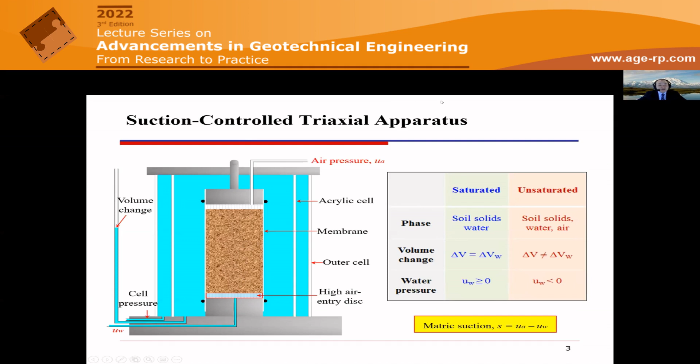Also, they replace the bottom porous stone with a high air entry ceramic disk. Its characteristic is that when it is saturated, only water can go through it, not air. They also supply some air pressure to squeeze the water out of the soil through the high air entry disk. By controlling the difference between air pressure and water pressure, which is the matric suction, we can control the whole stress path when testing unsaturated soils.

So these are the typical stress paths we use to characterize unsaturated soils. Because unsaturated soil behavior is so complicated, every time we just vary one variable while keeping the others constant.

For example, the first one is the isotropic compression test at constant suction. We control the suction, apply all-around pressure to increase the load, and observe the soil response. Of course, we do the test at different suction levels.

The second test is wetting and drying and wetting at different confining pressures, and we also have shearing tests. These kinds of tests are consolidated drained tests for unsaturated soils.

It's very time consuming. Each test takes about 2 to 3 months, and we need about 20 to 30 tests to fully characterize one soil, which takes a very long time, normally 3 to 5 years to finish one soil. So even though it is very challenging...

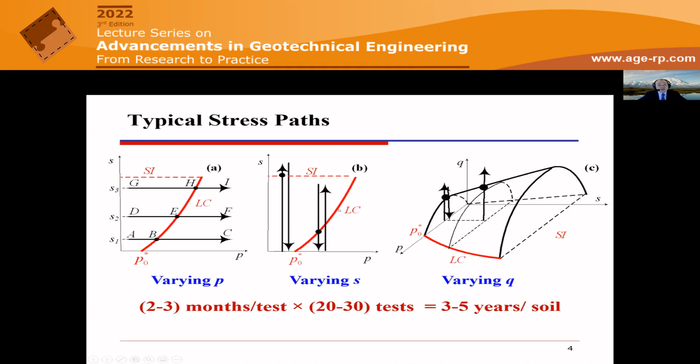...we have been doing testing for the past 6 decades, and now the suction-controlled test has become the standard for unsaturated soil characterization. All the existing theories are based upon results from suction-controlled triaxial tests.

Based upon the results from suction-controlled triaxial tests, Bishop, at the very beginning, and a lot of researchers tried to use the effective stress principle for saturated soil and extend it for unsaturated soil to explain unsaturated soil behavior. For example, Bishop proposed the Bishop's effective stress equation for unsaturated soil.

But Jennings and Burland, in 1962, found that for some compacted fine-grained soils, the soil experienced expansive soil behavior. For example, when you wet the soil at no confining stress, the volume of the soil will increase. But at a high confining pressure, at a constant load, if we add water to it, the soil can collapse. The effective stress equation cannot explain this classical soil behavior.

As a result, the conclusion was that the effective stress equation cannot be used for unsaturated soils. Then Matyas and Radhakrishna proposed a state surface approach.

They said maybe we need to separate the net normal stress and the suction, and then use them to investigate unsaturated soil behavior. This is called the state surface approach, where we use a unique state surface to represent the soil behavior as a function of net normal stress and suction.

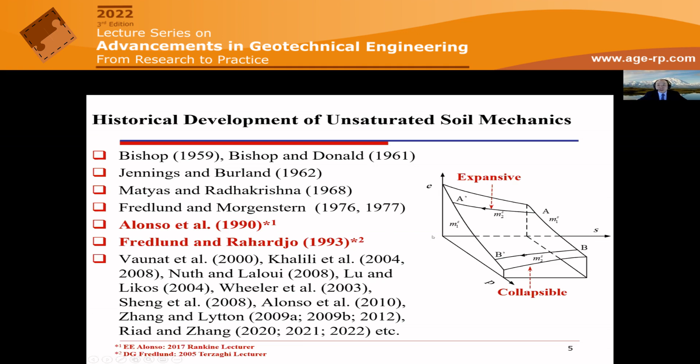That paper is very famous, and afterward many researchers proposed models following the line of the Alonso et al. 1990 paper. We will talk about it later. So please remember this figure—we will come back to it because this is the soil behavior we would like to simulate.

The 1990 paper was developed by Dr. Alonso, Gens, and Josa. It was the first elastoplastic model for unsaturated soil, and it was later called the Barcelona Basic Model, because they later developed a more advanced version for expansive soil behavior.

The model itself is mainly designed for collapsible soil behavior, and it is the most cited paper in constitutive modeling of unsaturated soils. Professor Sheng once said all existing elastoplastic models for unsaturated soils are variants of the Barcelona Basic Model.

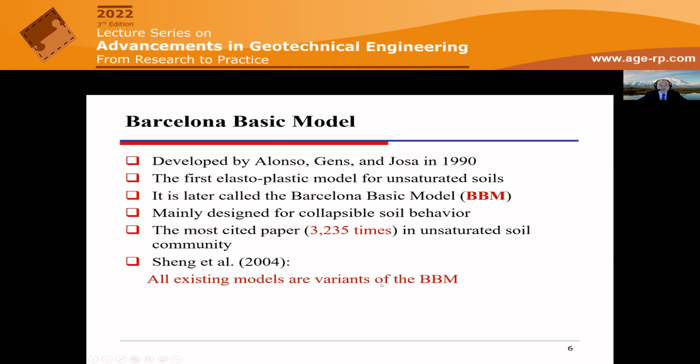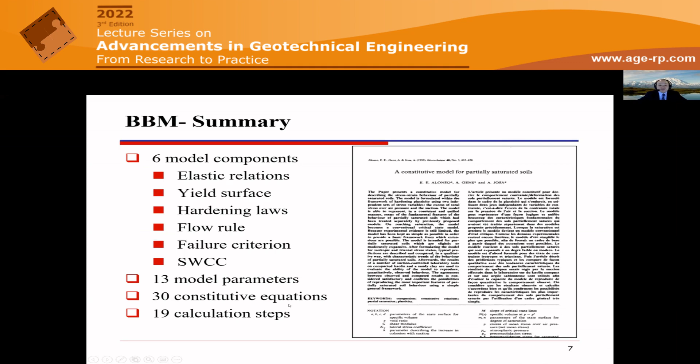So let us have a look at the model. This is a simple summary of the Barcelona basic model. If you read the paper, you'll find it has 6 model components, 13 model parameters, 30 constitutive equations, and if you want to do the calculation, there are 19 calculation steps, which is very complicated.

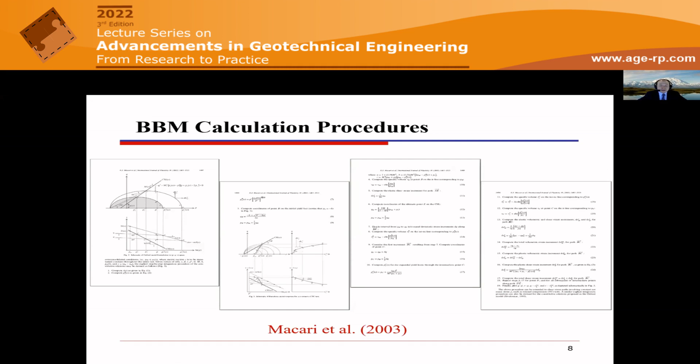So in this presentation, we would like to propose a new approach, which is called the modified state surface approach, to study the elastoplastic behavior for unsaturated soils.

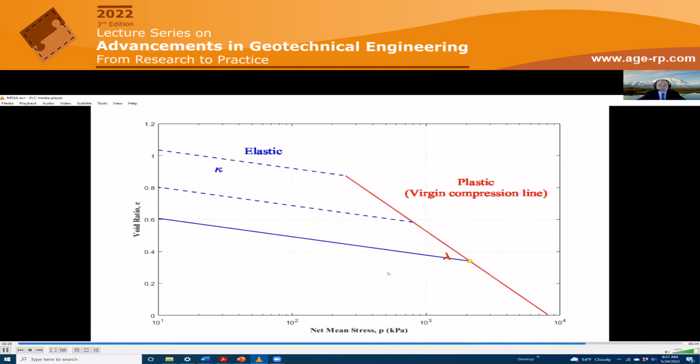Let me replay it again, because this is very important. As you can see, the virgin compression line is actually the future path of the yield point. This is the elastic unloading and reloading during this process, the elastic segment remains unchanged. And then this is plastic loading: the elastic segment will move parallelly downward. If you can understand this process, you can understand the modified state surface approach.

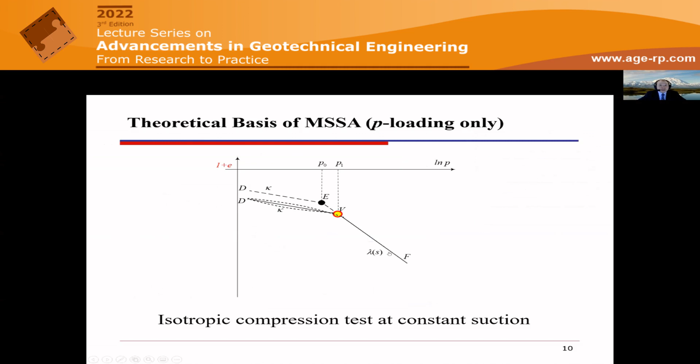So this is a summary for the modified state surface approach when we only have P loading. The test result can be separated into two segments: one is the plastic segment, which always remains stationary, and the other is the elastic segment, which is movable, but it only moves when there is a plastic loading, moving parallelly downward. It will not move when there is elastic loading or unloading. So the intercept point is the yield point. This is very important because it tells us the relationship between the yield point and the plastic segment. In fact, the plastic segment is the future path of the yield point.

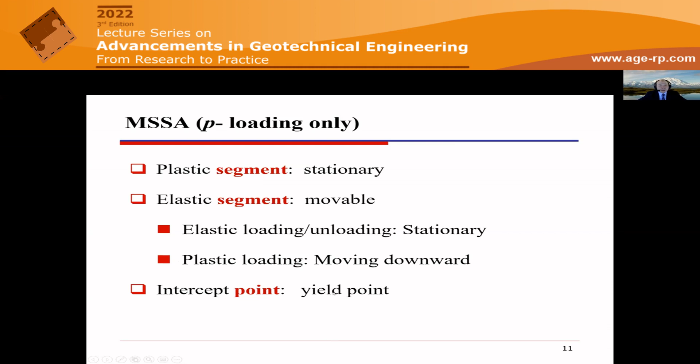Let us go to a slightly more complicated case. For example, we can run isotropic compression tests at different suction levels. For each suction, we have test results like what we showed previously: an elastic segment and a plastic segment. At one suction, and then at the next suction level, we can have the same thing. If we plot the results in the three-dimensional space of void ratio versus net normal stress and suction, you will find the plastic segments are always stationary, with the same shape in three-dimensional space. If we run the tests continuously at different suction levels, the plastic segments will become a fixed plastic surface.

And then the elastic segments will also become an elastic surface. And the intercept will not be a point. Instead, it will be a curve, which is the yield curve. So everything two-dimensional becomes three-dimensional, and everything one-dimensional becomes two-dimensional, right?

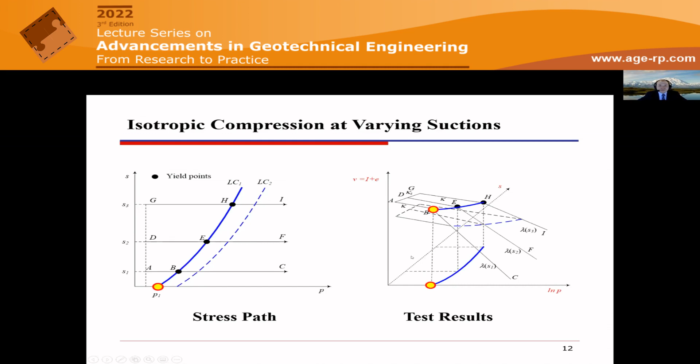So this is a summary for the modified state surface approach when we have the P and S loadings. We will have a plastic surface which is always stationary, and an elastic surface which is movable, but it only moves when there is plastic loading. It will move downward parallelly, and when there is elastic loading or unloading, it always remains stationary.

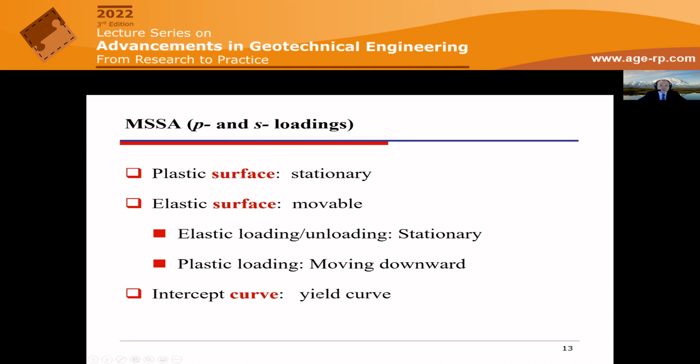And the intercept curve for these two surfaces is the yield curve. The yield curve, actually when it moves, the plastic surface is actually the future path of the yield curve, right? So this is the relationship between the yield curve and the plastic surface.

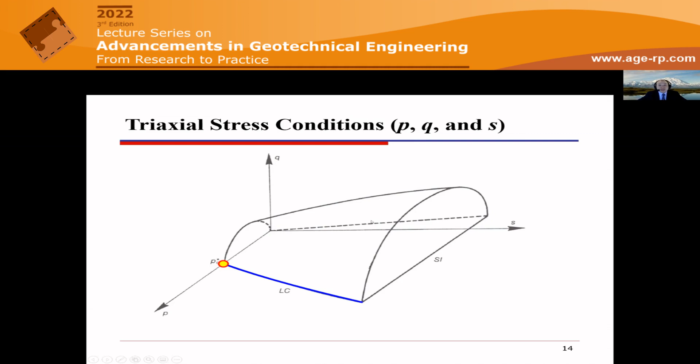And we can keep going by adding the deviatoric stress, but the problem becomes more complicated because now the void ratio is a function of P, Q, and S, and I cannot plot it, but we can still have the same concept. So for the triaxial stress state, we also have the modified state surface approach.

The volume of unsaturated soil becomes a plastic hypersurface. It always remains stationary. We have an elastic surface which is movable, but it only moves when there is plastic loading, and the intercept now is a surface, which is called the yield surface.

And we also have the failure behavior if we have a deviatoric stress. It is the critical state line on the hyperplastic surface. So for today's presentation, I will focus on the isotropic condition, and we will only talk about the first three surfaces.

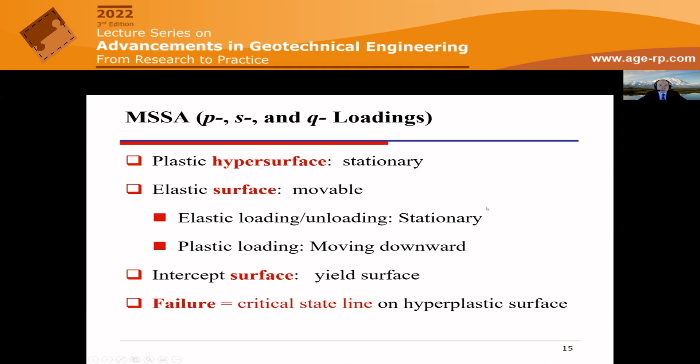So the first example I would like to show you for the application of the modified state surface approach is to use it to explain the Barcelona Basic Model. In the paper I published in the Canadian Geotechnical Journal, we found that in the Barcelona Basic Model, there are three surfaces used.

One is the elastic surface, which is represented by this figure, AFIH, which has an equation like this. And then for the plastic part, it has two surfaces. One is HIJC, which is responsible for the irrecoverable volume change during the drying shrinkage.

And then the second plastic surface, which is called JG, is the surface used to represent the unsaturated collapsible soil behavior.

And then we summarize the Barcelona Basic Model into three equations. If we would like to do the calculation, every time we just need one variable, which is C1, the intercept of the elastic surface with the void ratio axis, and all the rest are fixed. So the calculation will be very simple in our paper here.

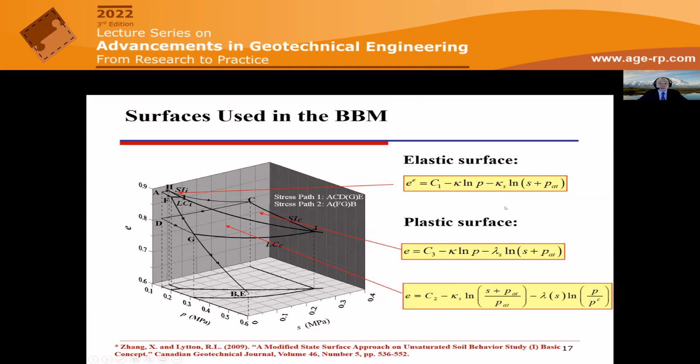It's detailed and explains how to do the calculation, but I want to just show you some videos based upon the calculation. For all the examples in the original Barcelona Basic Model, we have done calculations. If you go to YouTube and search the modified state surface approach, you can find all these videos for each of the examples.

For example, for case 2, the soil is originally saturated, and we increase the suction at a confining stress of 0.15 megapascal, increasing suction from 0 to 0.1. Then we load the soil from 0.15 to 0.6 megapascal, and after that we further dry the soil by increasing the suction from 0.1 to 0.2 megapascal.

So if you use the modified state surface approach, this is a video which shows it. Initially the soil is saturated, and then we dry the soil by increasing the suction at a constant load. This process is in an elastic zone, so as a result the elastic surface remains unchanged, the plastic surface remains unchanged. And then we apply load.

Once it reaches the yield curve, further loading will cause the soil to yield and the elastic surface to move parallelly downward. When it moves parallelly downward, it will form a new intercept curve, which is the yield curve with the plastic surface. So this process is called the evolution of the yield curve, and the elastic surface region is always expanding during plastic loading.

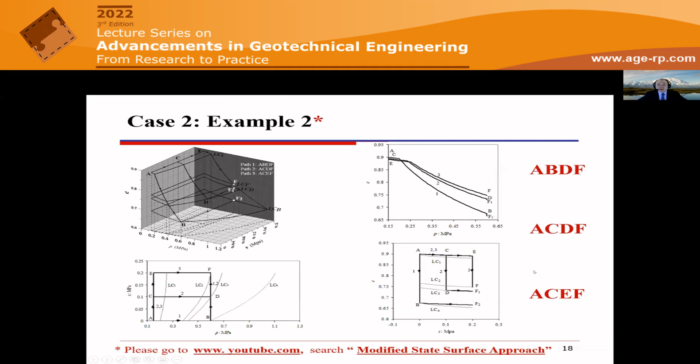And then we did all the calculation. We are able to match all the results in the original Barcelona basic model, except one case, which is the last example for the prediction of Karube's data. So the Karube data is a very interesting one.

They used two identical soil specimens starting from the same point A. For one soil specimen, they first dry the soil and then apply load to the soil at a constant suction. And at a constant load, they wet the soil to the original suction level, and then unload the soil to the original stress state.

And the second soil specimen, they do a reverse way. They first increase the load at a constant suction, and then increase suction at a constant load, and then reduce the load at a constant suction from C to B, and then wet the soil to its original stress state.

So I was able to reproduce the results in the original Barcelona basic model for the stress path of A, B, C, D, A. But we were unable to produce the results from A, D, C, B, A. What we found is there was a small mistake in the original Barcelona basic model.

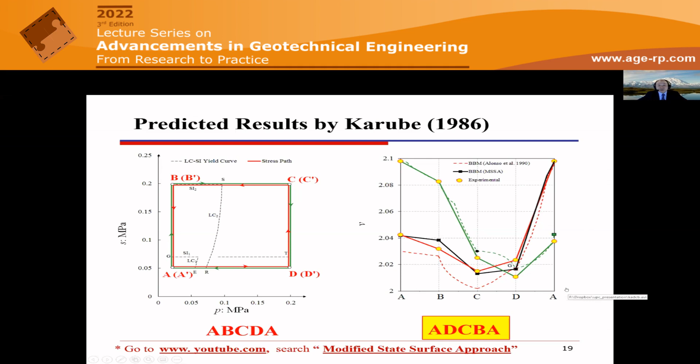So you may ask, why do we need the modified state surface approach? Of course, you proposed a new way to simplify the explanation of the Barcelona basic model, but what's your contribution?

So here I will show you an example why we need a modified state surface approach. For example, in 2004, the European Union funded a project called the MUSE Research Training Network.

One of the tasks for the MUSE Research Training Network is to benchmark the calibration of the constitutive model for unsaturated soils. So what they did was provide 7 universities with the same sets of experimental results, asked to calibrate using the same model, the Barcelona Basic Model, and the same test results to calibrate the same model parameters.

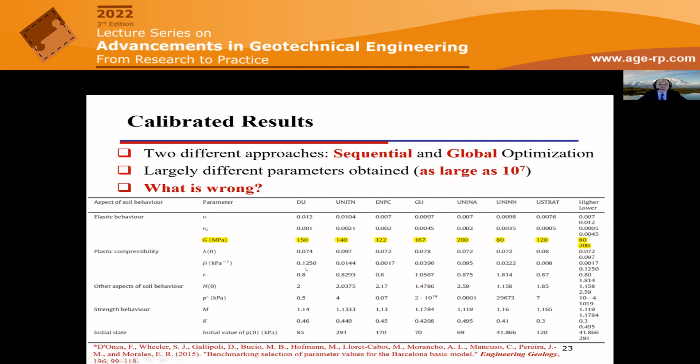So what's the problem? In that exercise, researchers used 2 different approaches: one is called the sequential approach, another is called global optimization. So to make my explanation clear, I would like to give you a simple example.

For example, if we would like to fit a plane using some experimental data, my model is a plane, and this is my test results. I have 4 points. AB is on a straight line at the XOZ plane, with the equation z equals 3 minus x. CD is on the YOZ plane, with the equation 2.5 minus 2y. If I need to fit the plane, this is the plane I will be able to fit. This is the equation we have.

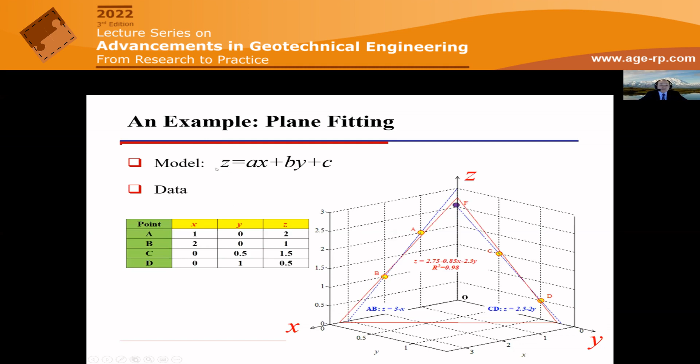So if we need to do the calibration of the model parameters using this data, we can do a sequential approach. In a sequential approach, what people normally do is use the first 2 points, A and B, and fit it with a straight line, getting the slope A, which is -1 here. Then in the second step, you use points C and D to fit a line, getting the slope -2 as B. Then you try to combine these two results as the model parameters for this plane.

Obviously this is not right. The reason is that for the first regression process, we just use the partial test results of A and B to do a partial best fit for the model parameters. It's the best fit for points A and B, but not the best fit for the overall results. The same thing happened for C and D. So even though each regression has 100% R squared, the overall R squared is very low - if you look here, it's 0.6.

If we would like to do a global optimization, which normally uses the incremental formulation, we just take the complete derivative of the analytical solution to get an incremental formulation like this. Then we select the initial point, any of the initial points, calculate dz, dx, dy, and try to optimize to get the model parameters A and B. This is not good either, because every time you have to select the initial point.

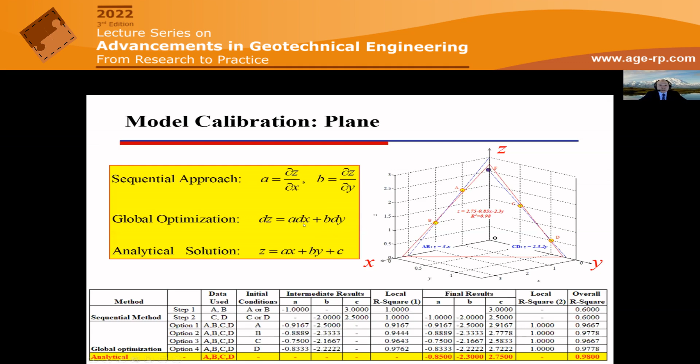So this is simple and clear, but you might not realize that at present, all of us are doing the sequential and global optimization approaches. The reason is that all of our existing models are proposed based upon the incremental formulation, based upon the slopes. For example, this is a summary of what we have for the Barcelona Basic Model - 3 equations, right?

But if you look at the original Barcelona Basic Model paper, you can find it was first proposed using the slope of the void ratio versus the applied net normal stress - a log-linear equation with a slope of kappa, right? And then they also proposed another incremental formulation, the void ratio change as a function of suction inside the elastic zone, with a slope of kappa sub s. So there are two slopes, and the equivalent model for the Barcelona model is the equation of a plane like this.

If you take a partial derivative of this equation, you can get these two slopes, partial derivatives, right? So this is what they proposed for the elastic part. So they also proposed the...

Part when there is drying shrinkage and irrecoverable volume change. They proposed a log linear line, which is lambda sub s, and also a horizontal SI yield curve. By doing so, it is equivalent to say in the plastic surface, when you apply load, the net normal stress and volume change have a log linear relationship, the same as kappa, which is in the elastic zone. And this is how this surface is formed.

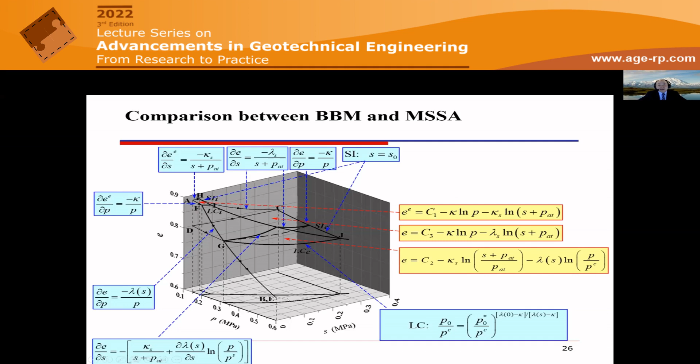But if you use our method, I can show you that the model calibration for unsaturated soil is very easy, because we have the closed form solution. We can just use the test results and best fit these equations, and then we can get the results. So I can show you another example, which includes both the model parameter calibration and the determination of the yield curve.

So there's an argument in terms of what is actually the LC yield curve. It's well accepted, its shape, but there's an argument for the SI yield curve. So many researchers have proposed different kinds of yield curve shapes for the SI yield curve.

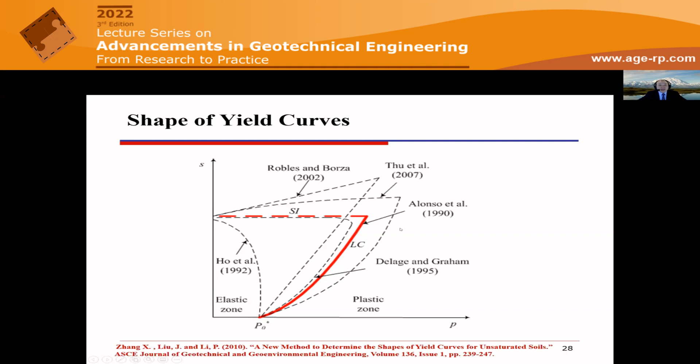So at present, this is how we determine the LC yield curve. We will run a lot of isotropic compression tests at constant suction level, and we have some test results like this. And then by using the Casagrande method, we can find the yield point. For example, for each test, we plot in the P versus S stress path space, and then connect the yield points to get the yield curve.

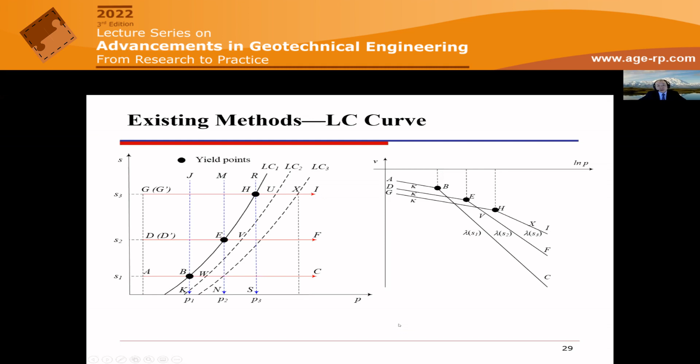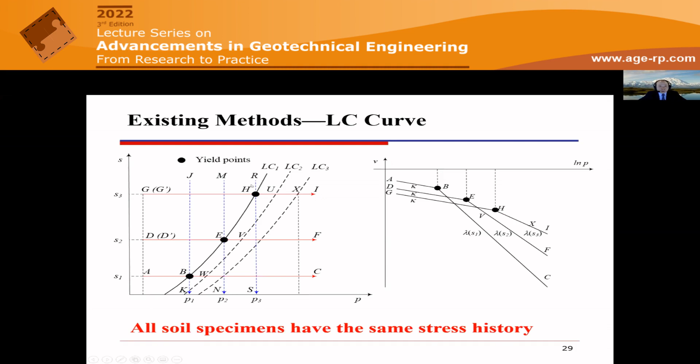So this method is straightforward, but it requires all the soil specimens to have the same stress history, so that all the yield points are on the same yield curve. But in reality, it's very difficult to get identical soil specimens.

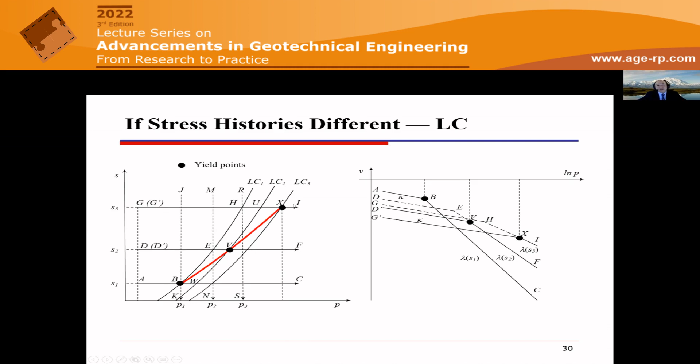And if the soil specimen does not have the same stress history, for example, for the second soil specimen this is its yield curve, and for the third soil specimen this is its yield curve. When you run the tests for isotropic compression, you can still get a similar shape of the specific volume versus ln p curve, and you can still find the yield points, but you will not know if they are on the same yield curve or not. If they are not on the same yield curve and you connect them, it's a wrong result.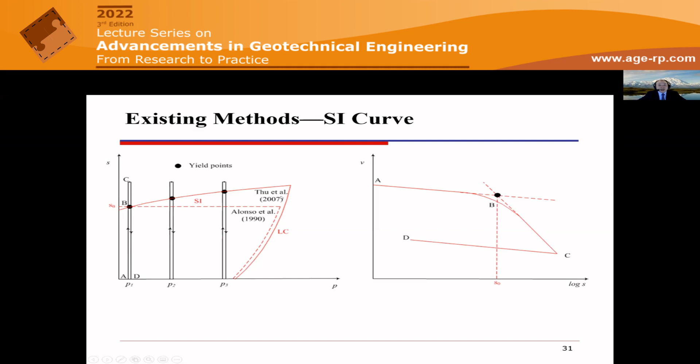So some researchers also use a similar method to determine the SI yield curve, by running drying and wetting tests at constant load, then determining the yield points and connecting them to get the yield curve. This is exactly what is done in Thu et al. 2007. But it also requires all the soil specimens to have the same stress history.

But if the soil has a different stress history, then even if the soil has a horizontal SI yield curve, if you run the test and use the existing method to analyze the SI yield curve, you can get a curve like this. So the existing method is not good if you use soil specimens with different stress histories.

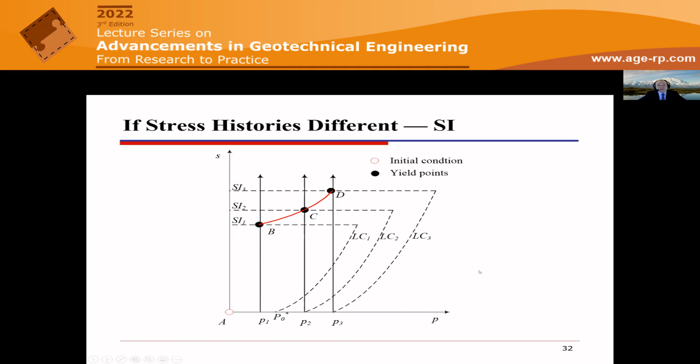But if you use our method, it will be quite simple. For example, these are the test results we obtained from Thu et al. 2007 for a bunch of isotropic compression tests at different suction levels. These are the test results.

We can get the yield points using the constant gradient method. What you need to do is plot all the results in three-dimensional case, and then separate them. From the yield point, you have the elastic segment and the plastic segment. It doesn't matter if the soil specimens have the same stress history, because all these plastic segments will be on the plastic surface.

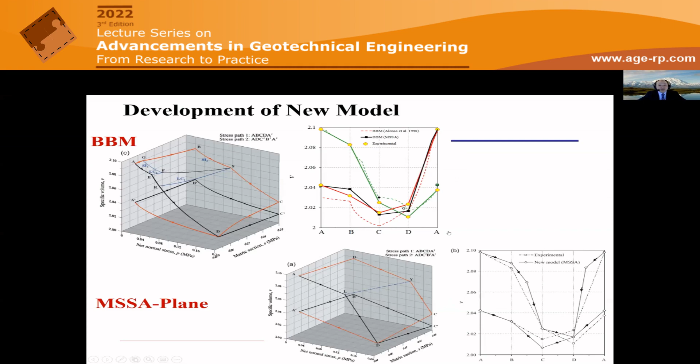So let's go back to this story. For this test results, by doing so we can find the yield curve for this soil. For example, the red solid lines represent the results from Thu et al. for the LC yield curve, and this red curve is the SI yield curve from Thu et al.

But the black lines are the yield curve we got from the modified state surface approach. For this part, the LC yield curve is the same as the Barcelona basic model, but for this part it's different. What we found is that in Thu et al., when they ran the test, they changed the stress history of the soil.

For example, if I would like to run a drying and wetting test, in order to do the test, if I have a soil specimen which is initially saturated, I will have to apply load to a stress of 200 kPa, and then do the drying and wetting test. So during this process, if I load the soil from 0 to 200, I have already yielded the soil in order to be able to run the test.

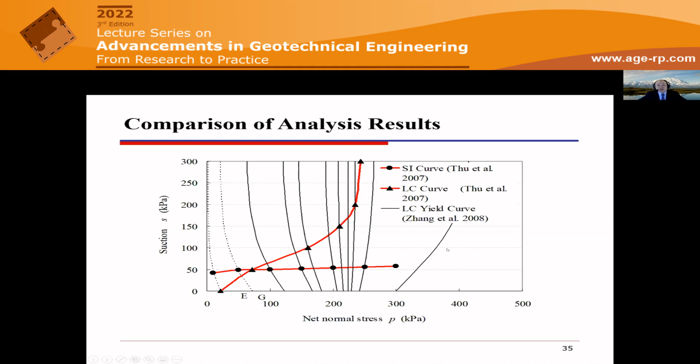Remember, at the very beginning, most compacted soils are expansive at low confining stress levels and become collapsible at high stress levels. This is exactly the yield curve we need to simulate expansive and collapsible soil behavior in a unified framework.

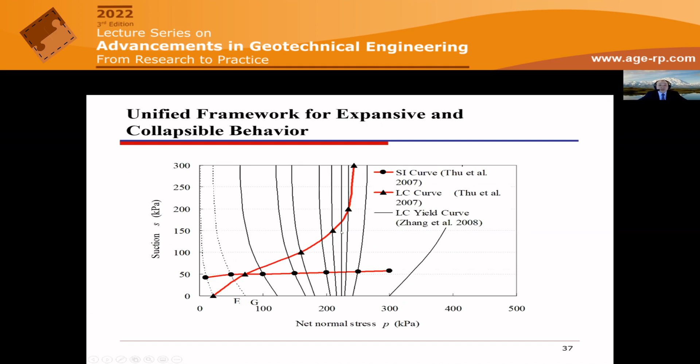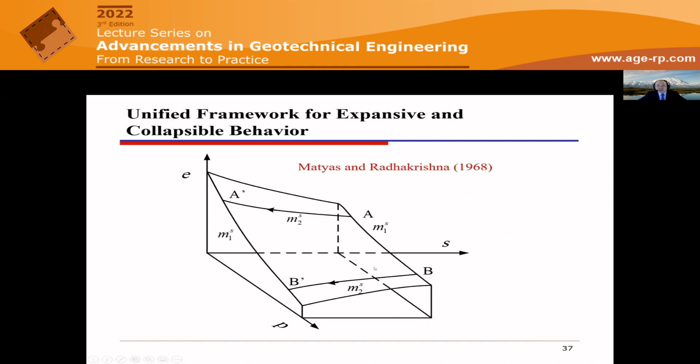So if you have this kind of yield curve, it corresponds to a state surface like this. At low confining stress, the soil is expansive—if you add water, the soil will swell. At a high stress level, if you add water, the soil will collapse.

For example, in our second paper on the modified state surface approach, we showed that if you start from point A, when the soil is dry, and apply load to point C at a low stress level, then wet the soil, it will increase in volume, going from C to D.

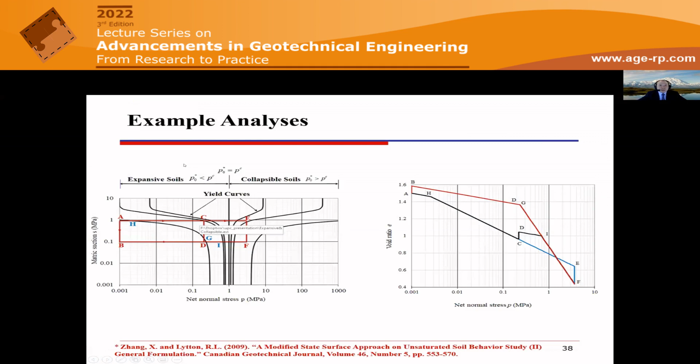By doing so, actually we can simulate both expansive soil and collapsible soil in a unified framework. We also did some kinds of extension for the modified state surface approach to model the coupled hydromechanical stress behavior, because in the original Barcelona basic model, they only have the elastoplastic model for the volume change part. For the hydraulic part, they do not have an elastoplastic model.

What we found is if you have a constant suction loading curve, for example, if we load the soil from A to B and unload to C, of course B is the yield point because we have irrecoverable volume change. This is for void ratio, and for the water content, the yield point is at the same location, and for the degree of saturation it is at the same location. So this is for the consolidated drained test.

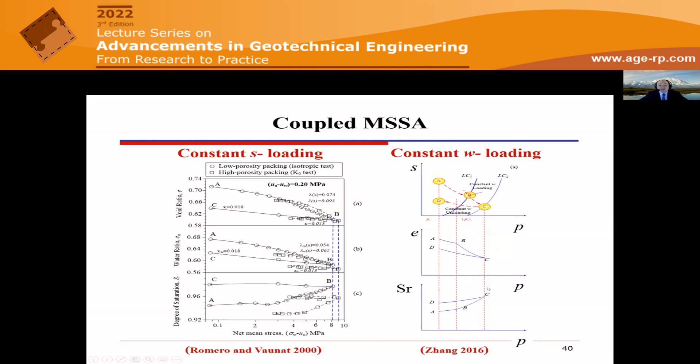For the undrained test, for example a constant water content test, if we apply load from A to B, which reaches the initial yield curve, and keep loading in an undrained condition to C and unload, what we found is point C is the yield point, same for the void ratio and the degree of saturation. So as a result, we conclude for both the volume change and the hydraulic part, they always share the same yield point. We added this component to the modified state surface approach to model the coupled behavior.

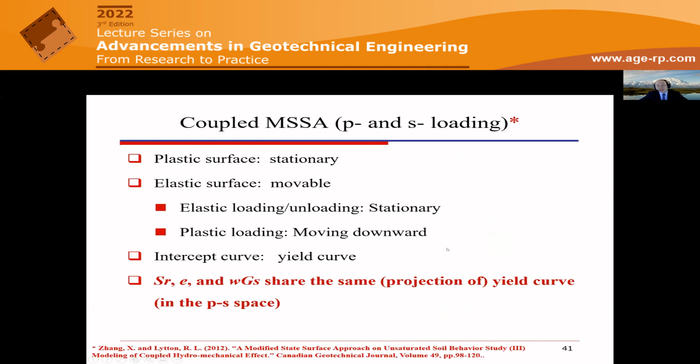In one sentence: the degree of saturation, void ratio, and water content actually share the same projection of the yield point or yield curve in the p-s space. By doing so, we can model a coupled hydromechanical behavior for unsaturated soils.

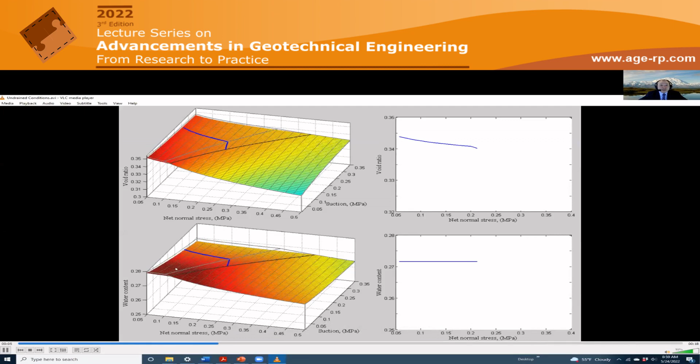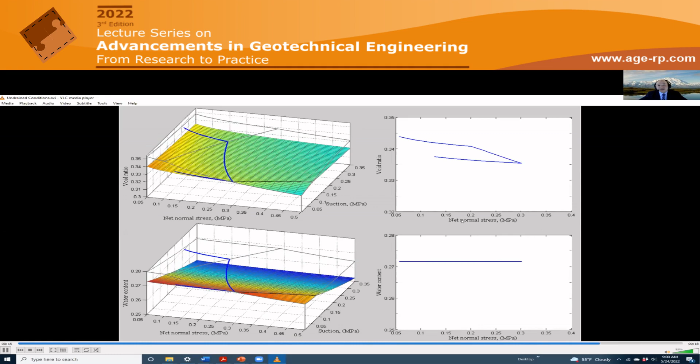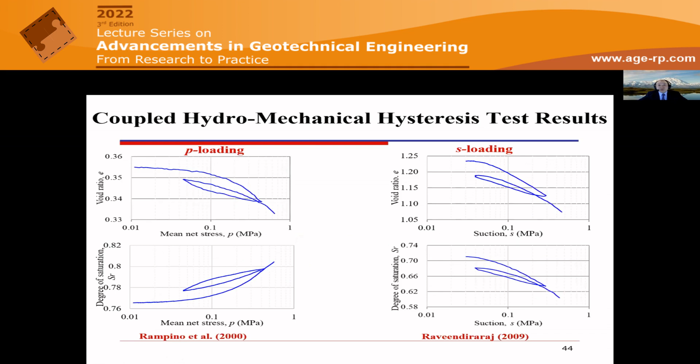But in the real soil behavior, when you load the soil and unload, there's a hysteresis. If you just apply load and unloading at a constant suction level, or if you wet or dry the soil at a constant load, you also have hysteresis. These kinds of behavior cannot be simulated by existing models, so we also added components to the modified state surface approach to handle the hysteresis.

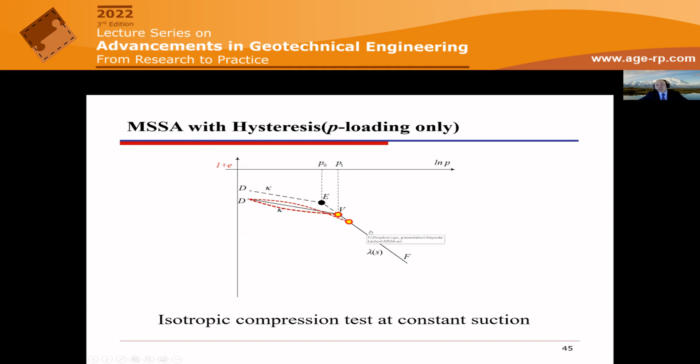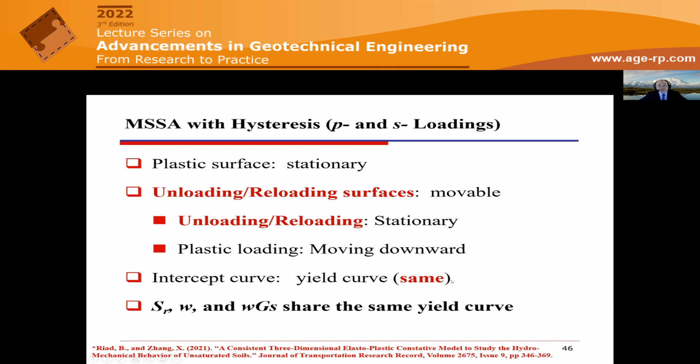So this is the modified state surface approach with consideration of the hysteresis. You need an unloading surface which is different from the reloading surface. The two surfaces are movable, but they only move when there is plastic loading, not during unloading or reloading. The plastic surface is always stationary, and the yield curve is always the same, because they always go back to the same normal compression line. Let me show you an example of what this looks like.

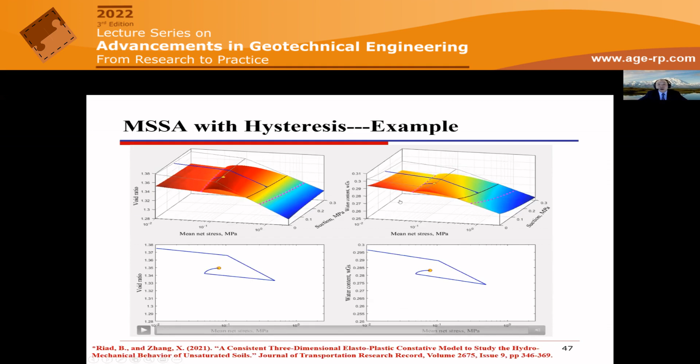Remember, this is unloading and reloading. When there's unloading, the unloading surface remains unchanged. When there's reloading, the reloading surface remains unchanged. But both surfaces have an intersection curve with the plastic surface, so they share the same shape but with different stress histories. This makes the modeling very simple, and you always have the same yield curve. You can model the hysteresis behavior for void ratio and water content simultaneously.

So this is my conclusion. We proposed a modified state surface approach to simulate unsaturated soil behavior. It bridges the gap between the original state surface approach and the existing elastoplastic theory for unsaturated soils. It provides an integrated, closed-form solution for a constitutive model. It establishes a relationship between the yield curve and virgin compression lines—actually they are the same. It can be used for many applications, modeling expansive and collapsible soil behavior in a unified framework, and it has many advantages over existing incremental formulations. It can also be easily extended to model coupled hydromechanical behavior for unsaturated soils.

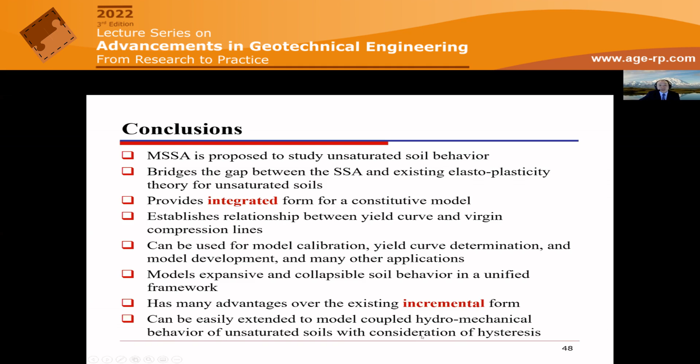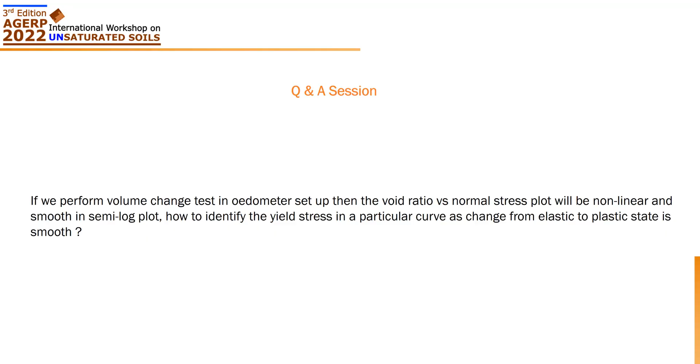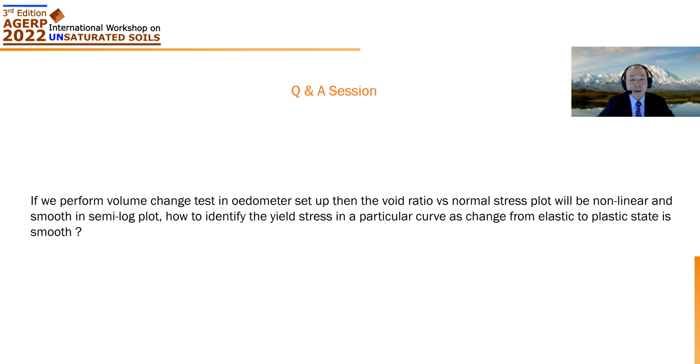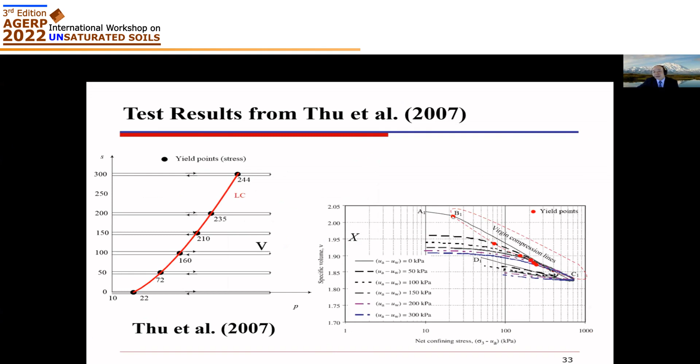Actually, this is a very good question. I will come back to my original position. The benefit of the modified state surface approach is that it does not require you to accurately predict the yield point. Normally we use the Casagrande method to estimate the yield point, but most of the time it's not accurate, because it's an empirical method. With our method, you don't have to have an accurate prediction of the yield point.

For example, for this segment, for the second test, if you're not confident to say V is the yield point, what you can do is select a value large enough so that you're comfortable saying this is for sure on the normal compression line. So you just use a smaller segment, for example from this point to F, and use it to do the regression to fit your model. You can still get the plastic surface, and after you get the plastic surface and the elastic surface, you'll have a very good feeling whether V is on the plastic surface or not. Does this make sense? You do not need an accurate prediction of the yield point if you use our method.

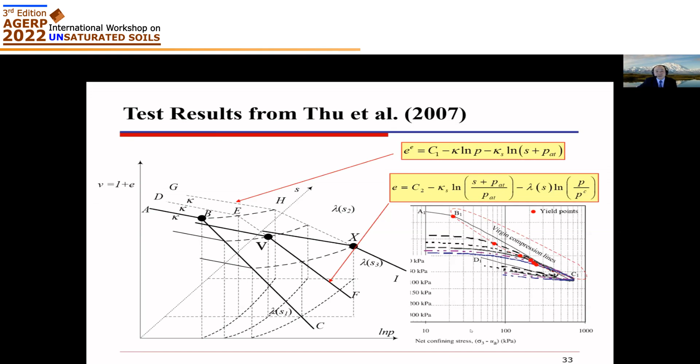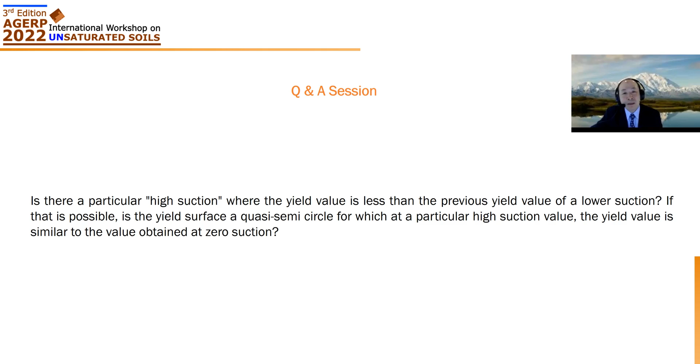I don't think so. Normally the yield stress will always increase—if you apply load, it will always increase to a higher value, so it will not come back. For some future situations, if you want to simulate a different scenario, you might need a new framework, but I do not think in the current critical state soil mechanics or generalized plasticity we can allow this to happen.

You have many ways to do so, because remember you have a closed-form solution. It really depends on how confident you are with the model. Normally, if you are confident with your test results, the next question is you can select different equations to best fit the data so that you can have the best model, which is what I've shown here.

Another possibility is you're very confident with your model—you think this is a very good model which can represent the soil behavior well, but you have less confidence in the soil test. Then what you can do is use a method called the RANSAC method, which, assuming the model is correct, can automatically filter the wrong data and only use the correct data to best fit your model. So these are two different scenarios you can consider.